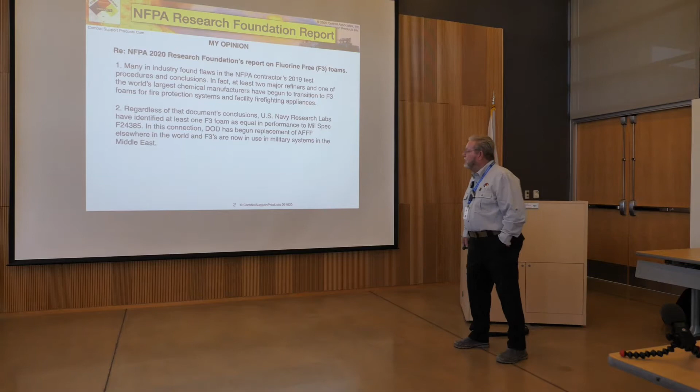Regardless of the document's conclusions, the U.S. Navy Research Laboratory has identified at least one F3 foam as equal in performance to mil-spec F24385, which is what the airports are using and all military people are using. In this connection, the Department of Defense has begun replacement of AFFF elsewhere in the world, and F3s are now in use in military systems in the Middle East.

So they've already made up their mind that the train's on the tracks, we're moving, and the technology today is way past what my esteemed friends in the committee did back in 2019. This is a moving target. So in defense of anybody that has any argument one way or the other, this is a moving target from a technology perspective. Government is forcing the issue in many cases, where they have prevented firefighters from using the good old AFFF that we happen to know is tried and true.

So they had to make a transition real fast in certain states. New York is one of them — in March, they have to do it. They have to make the transition out. They had been given a 2-year warning. And that would be one of the local states that might affect what you do or do not do.

Connecticut has already done it, and New Hampshire has done it. So I don't know where the Commonwealth of Massachusetts stands on it, but I suspect sooner or later there's going to be some sort of prohibition on the use of firefighting foams with PFAS in it.

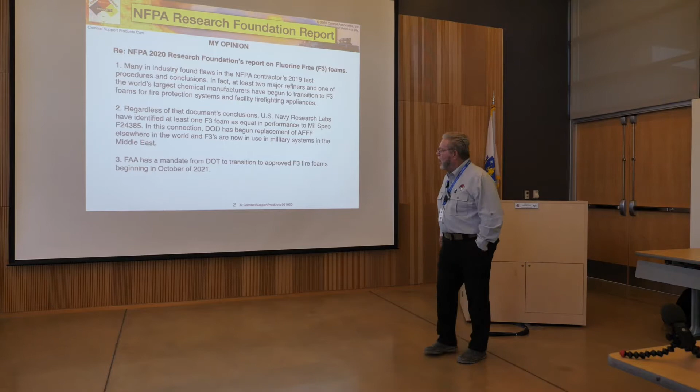Third, FAA has a mandate from Department of Transportation. FAA reports to Department of Transportation to transition to an approved F3 fire foam beginning in October of 2021. So the fuse is burned down to the charge right now as far as FAA is concerned. Now FAA says you don't have to — they're just giving the authority having jurisdiction the option to transition out of a mil-spec AFFF.

Finally, AFFF versus F3 — that would be aqueous film forming foam versus fluorine-free — is moot in many states where the use of AFFF PFAS is disallowed. So somebody's got to do something anyway.

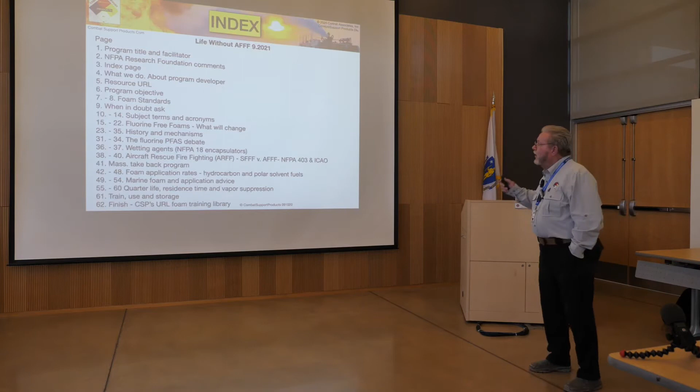There's the index that you heard tell of. I'm not going to spend a whole lot of time on that, but if you want to dig into the subject without any commercial speak, this is about as good as I can get it.

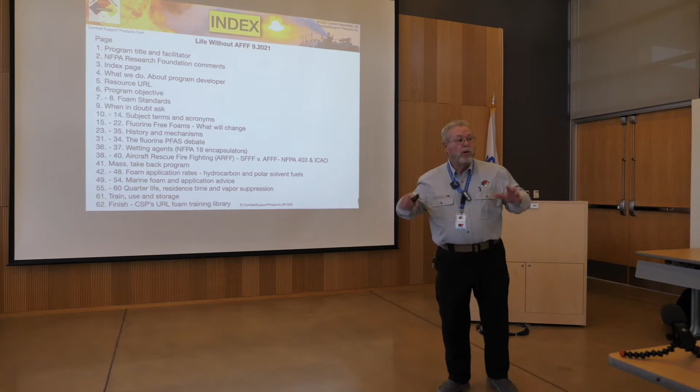This is the most current information that I have, and I'm probably one of the better contact people in the nation for this particular stuff for the fire service, because the fire service doesn't have anybody looking after them. The cop shop does, but the fire service doesn't. And it's the good old boy endorsement network in the fire service. Who's doing what is the question.

I rely on Underwriters Laboratory. Have to — most people do that are in the highly protected risk business. What do I do? What you see here, we do R&D, a lot of R&D lately, fire testing.

In fact, Wednesday and Thursday last, we were in New Jersey testing, doing UL tests on fluorine-free firefighting agents, the wetting agents, and the Class B foams, and that got all done at the request of the New Jersey State Police, who are pretty much in charge of driving the bus as far as hazmats are concerned in the state of New Jersey.

What they have done is pass the finance ball over. They write the checks and let the fire guys do what they have to do, which is a really good relationship, because as you know, the cop shop is much better funded than we are, usually speaking.

I do FDNY consulting, a lot of that. I look after all of their things, anything that has to do with foam, and have for more than 10 years, and their marine fleet. I look after systems on the marine fleet, foam systems, that is.

We manufacture these kinds of things, these foam trailers, and I do what we call special operations training. I'll go to an oil terminal and take the outside fire department inside an oil terminal. We call it a day behind the fence, to point out where the problems lie for the fire guys, not the engineering guys.

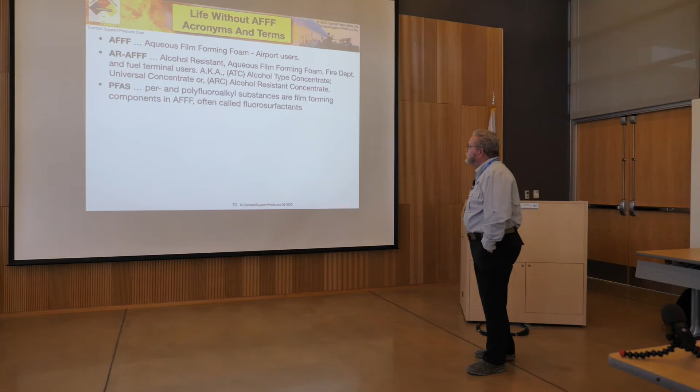AFFF: Aqueous Film Forming Foam, airport users. AR-AFFF: alcohol-resistant aqueous film forming foam, fire department users. PFAS: per and polyfluoroalkyl substance, the film forming component in AFFF, also called fluorosurfactants. SFFF, not to be confused with AFFF - this one's got me a little bit concerned because NFPA is now starting to use that acronym in the new standard, which tends to throw a little confusion into the game. Synthetic Fluorine Free Foam, not to be confused with Aqueous Film Forming Foam. In the industry, at least the window that I look out of, I use F3, Foxtrot 3. So there's that separation. Then there's an alcohol-resistant version of it, so it would be ARSFFF or ARF3.

Third-party certifications: since most of us in the industry aren't in the crapshoot, fire service is, and for some reason, I don't know why, there's nobody looking after them, but the guys that have to write the checks, the insurance guys, they want to see test results, they want to see third-party certifications. So the Navy is one, the U.S. Coast Guard is another, and they're very, very difficult to deal with. The Coast Guard is probably one of the toughest hoops to jump through for those in the manufacturing business.

Green Screen certification is now an international third-party environmental certification. If I say I have a fluorine-free agent, who else says it? If it's Jimmy Cottrell foam and I'm out there writing my own literature saying it's fluorine-free, who verifies that? Do you have to send it off to be tested or what? So there is an organization called Green Screen. It's international, and they are the watchdog in the chemistry world for things that are not cool as far as the environment is concerned. So now they're saying yes or no to PFAS - yes, the product has PFAS, no, the product doesn't have PFAS.

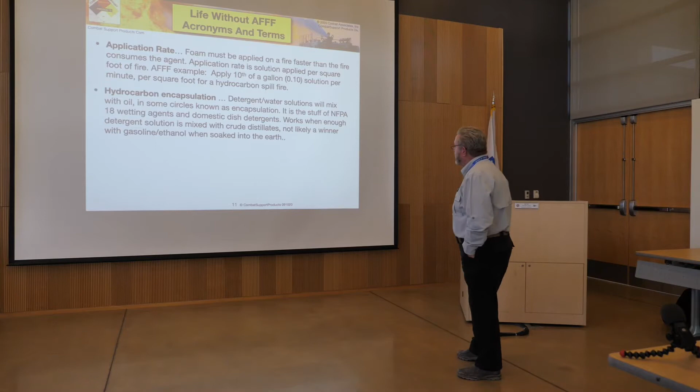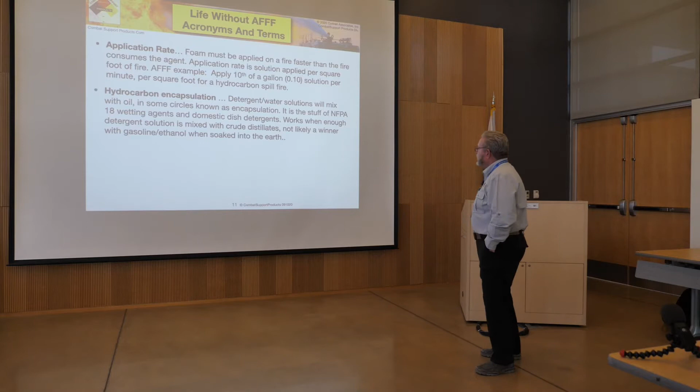Hydrocarbon encapsulation is a word that's getting thrown around the fire service a lot. In the oil patch, we're not hearing this, but the fire guys are hearing it a lot. Detergent water solutions will mix with oil, in some circles known as encapsulation. It is the stuff of NFPA 18 wetting agents and domestic dish detergents. Works when enough detergent solution is mixed with crude distillates. Not a likely winner with gasoline ethanol, or when the fuel is soaked in the earth, because with a detergent you've got to mix it.

And when I do my demonstrations with our wetting agents at the company I represent, I actually discharge a jet of detergent into a pan that has water and diesel fuel in it, and eventually the fire goes out because I have to mix it.

The detergents have pluses and minuses in them, from a chemistry speak, all right? Water and oil are all positive, let's just say, for chemistry speak, so they're repelling all the time. They will not come together. So when I put a detergent in its midst, I have to shake it or stir it to get the electrical systems' plus to connect to the minus. So that's what the energy does. It realigns the electrical systems so the oil and the water mix together. Without energy, you're not going to make the connections.

And this is why I typically use a jet of water through the 2.5 gallon water extinguisher to churn up the fuel. If I don't do that, the fire won't go out. So you're not going to have that luxury in combat, but it looks good for a demonstration.

Hot road spill — this is what scares me. This is what has my interest for you in terms of safety and survivability, also out in the fleet with Navy guys on a flight line or in aviation.

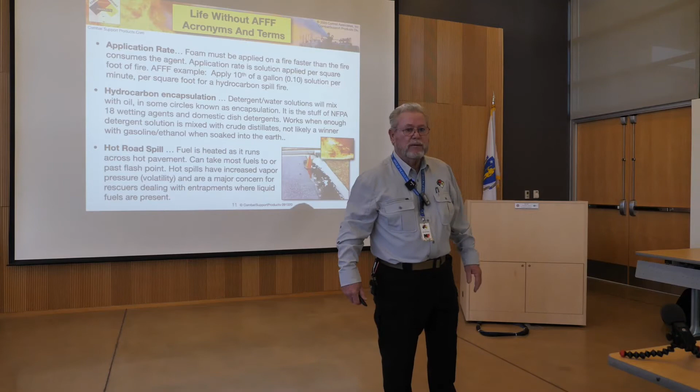Here at school we do these flammable—really it's combustible—liquid training with diesel fuel, home fuel oil, or kerosene, and just spray water into it until the temperature of the kerosene gets to the temperature of the water, and it goes out. We're lowering its flash point with the introduction of water streams. So once we get it much below its flash point, the fire goes out. Gasoline, you're never going to make that happen. Never going to make it happen.

Application types. Type 2 applications include those that one would use on foam-destructive fuels such as polar solvents and some acids.

Use a bank-in backsplash off the side of wreckage, or roll-on using nozzle velocity, to push foam onto a fuel spill or a gas or a fire as gently as possible. I've always been a fan of that. Even though I know the AFFFs could plunge into it and come up and still put the fire out, gentle application on alcohols is a must.

You cannot plunge your alcohol-resistant AFFFs into alcohols. It's got to hit the side of a wreckage, slide down, and creep across the fuel, or use nozzle velocity, as you're seeing in this shot, pushing the foam onto the fuel spill.

Hold vapors down—when do you replace it? When you smell gasoline, put it on again. I know I've got a $10,000 gas detector there, but if your troops are smelling gasoline while they're doing whatever it is they're doing, chances are you need to put a cap on it. Or use your instruments to tell you whether you've got hot fuel.

Type 3 applications include those that one would use on a fuel storage tank fire where over-the-top application is required, or where spill fires are engaged with plunging foam streams from hand lines, or these types of applications.

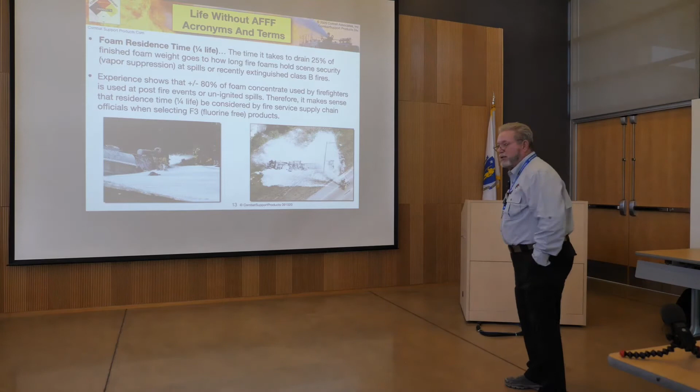Experience shows, now this is more statistical stuff that I've had to do. In fact, I had to do it for Colorado when they passed their law. And I'm saying to people off the record, talking to legislators, wait a minute. These guys don't put PFAS into the drinking water when they're fighting fire. The environmental impact is when they're holding scene security. They could be doing this for hours. Putting the fire out is a 15-minute exercise.

With gasoline, if you don't do something about it, it's going to be gone pretty quick anyway. It burns out about 1/8 of an inch a minute. So by the time all the king's horses and all the king's men and women get there to do something about it, most of the violence is over. Unless it's pooled, or worse, soaked into the ground. Once it soaks into the ground, you have a catalytic fire, no more surface fire. Slows it way down, but the fire is no less hot. So fuel soaked into the earth becomes a catalytic, capillary fire. A candle lifts the wax up the wick from the heat - that's a catalytic or capillary fire. So when fuel soaks into the earth and it ignites, that's the fire you have.

Fire protection engineering, be damned, there's nobody that does that research.

I worry about it. Did I just blow somebody's ears away when I hit that microphone? Anyway...

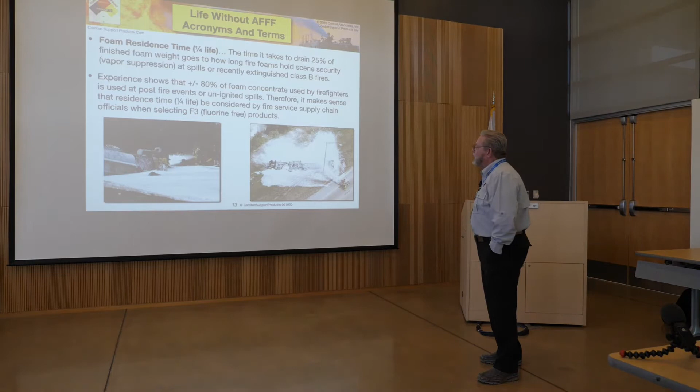Therefore it makes sense that residence time, quarter life, be considered by fire service supply chain officials when selecting F3 fluorine-free foam products. About 80% of foam concentrate sold for Class B fires is used for babysitting spills or unignited events, because there's still fuel. If it's been burning for an hour, chances are there's not much fuel left. Chances are you've got 18 200-pound rubber tires burning and a whole lot of fiberglass that still keeps that black stain in the sky. Chances are there's not a whole lot of fuel there left anymore, other than what may be in the trough of the tanker truck that will burn down to its liquid level.

So what the fire service is looking for is a stout brew for vapor suppression. But you want a light beer for fighting a flammable liquid spill fire - a light, frothy AFFF. Back in the day, or still today, you have that option. The AFFF as a froth puts the fire out pretty much on contact.

If there's no fire, there is no application rate. Just maintain a good 3, if you can, 3 or 4 inch blanket of foam. Gentlemen, ladies, it's water weight in the foam blanket that holds vapors down, not the bubbles. As the water drains out of the foam, gravity takes it out. The faster it takes it out, the lighter the foam gets, and eventually vapor escapes and finds its way to a source of ignition, and then the foam blanket lights up as well.

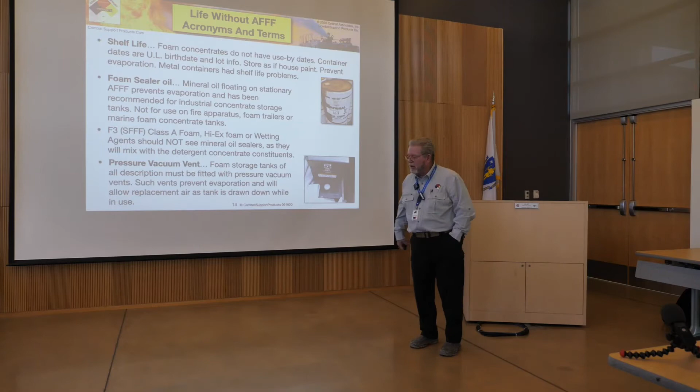Pressure vacuum vent. Foam storage tanks of all descriptions must be fitted with pressure vacuum vents. Such vents prevent evaporation and will allow replacement air as the tank is drawn down. So fluorine-free foams, these rules apply to those as well.

All your rigs have a pressure and vacuum vent on them. Whether they're in good mechanical condition, I can't vouch for, but if they're doing their job, the foam in the tank will be fine, regardless of how old it is. But you're going to have a problem with foam froth trapped in the pressure and vacuum vent if you don't keep the tank sealed.

The alcohol-resistant chemical that's in firefighting foam is sugar, xanthan, X-A-N-T-H-A-N, xanthan gum. Look on the back of your salad dressing container, that's what it is. It just so happens that when it detects alcohol, it kind of polymerizes and does what it's supposed to do. That's the stuff that gets caught in vents, and it dries, sort of like a loogie on your shirt - it's wet when it started and it's dried and you can't even peel your pocket open. The vent works the same way. Pressure vacuum vents will get stuck from that sugar.

What will change when you make the move to F3 foams? What will it affect? That's me when I was a kid, F3 foam, and when they had color pictures in those days too, smartass. I know you're going to say something. Anyway,

What's going to change? Application rates will increase due to the withdrawal of PFAS fluorosurfactants. F3 wetting agents have no such guidance, so wetting agents don't even have these guidances. Per UL 162, when using synthetic fluorine-free foams on hydrocarbon spill fires compared to AFFF, the rate increases from 0.10 gallons per minute per square foot to 0.16. And any way of looking at the math, that's 60%.

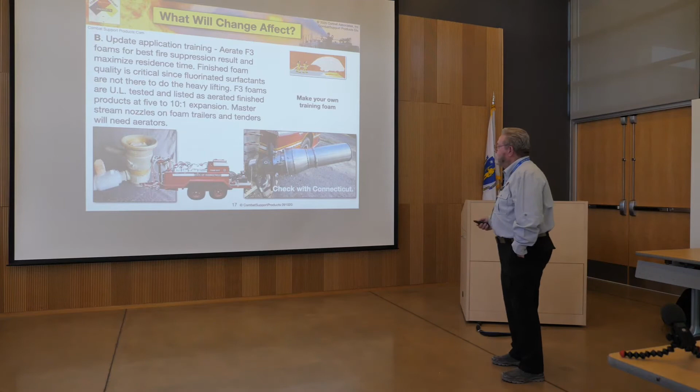Somehow nobody told you all that in the Commonwealth, because I see a lot of foam trailers without aerators on their master stream device. As long as they're dealing with hydrocarbons, they were good to go. So we're now making aerators for that old brass nozzle that's on most of your trailers and Connecticut's trailers.

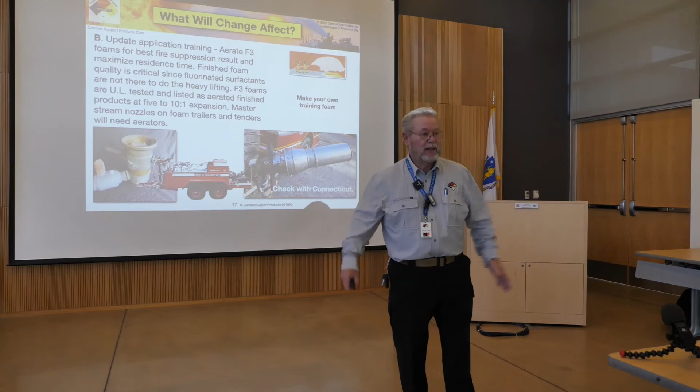They've had me engineer a clamp-on thing to make their systems work with the fluorine-free. Connecticut's making the transition, but they're not done yet. They're in trouble trying to figure out the definition of clean - how many parts per million or per billion in the rinse water and all the rest. So they haven't started filling the foam trailers yet until we get the definition of what clean is. But they are making all the changes to the firefighting equipment to accommodate the fluorine-free foams.

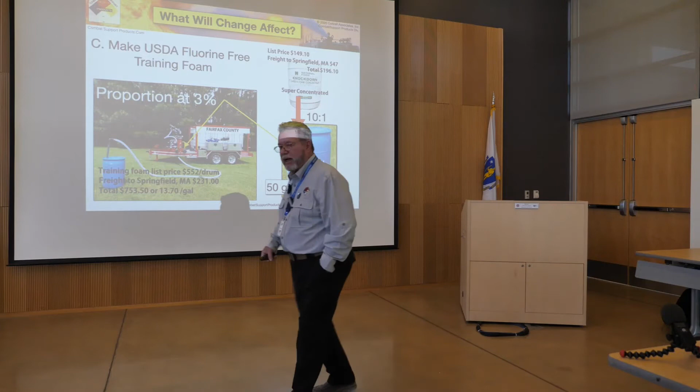Now, here's something my management group is not likely to be happy with, but I'm going to tell you anyway. When somebody orders a drum of training foam, it's going to cost $753.50 to get it to Springfield, Massachusetts. Big freight bill - we're shipping you a lot of water.

Probably about 50 gallons of water. The rest of this stuff is super concentrated, Mr. Bubble. So this is what I tell people to do: take the super concentrated stuff, which is USDA approved already because it's US Forest Service approved. So as far as they're concerned, it's good to go - Bambi can drink out of the pond after we go over it with a helicopter.

So I take a 50-gallon drum of water, put the water in the drum first, then put in 5 gallons of concentrate on top of it. In about 10 minutes, it's in solution. It'll disperse in the water column without you having to use a paddle or roll it around or anything. And I can do this for $3 and change.

So it's costing you a bloody fortune to ship the water from North Carolina or Indiana or wherever the foam factories are - Pennsylvania doesn't have foam factories anymore. And the freight costs are killers.

So what I do with our larger customers, where I do a lot of big training with big equipment, is I just fill a tote up 3/4 of the way with water and put in 1 or 2 5-gallon pails of this stuff and train our brains out. It's almost free, all things considered, and zero environmental impact. So there's a little tip for you.

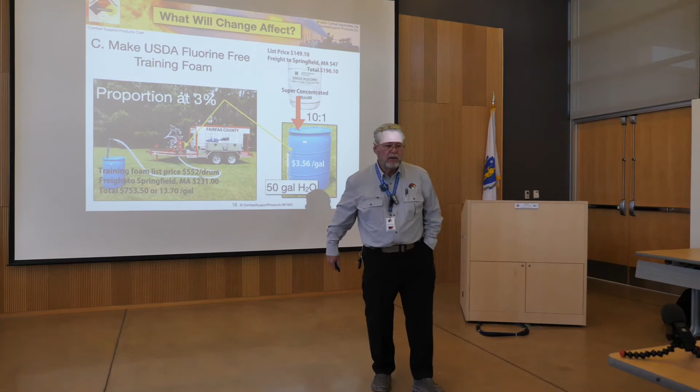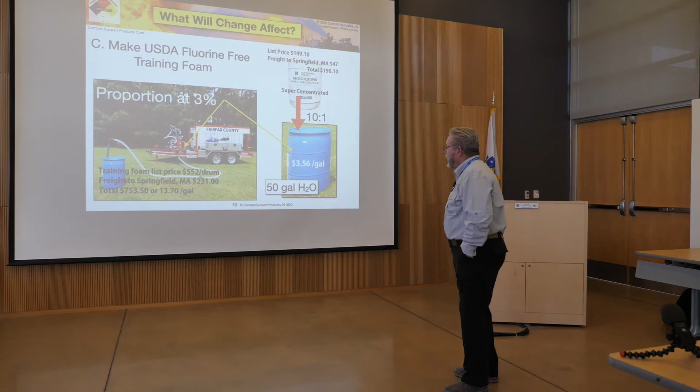The training foam - you can make it yourself without having any environmental impact. I think I'd let this go through the nick sniff test first before you go ahead and jump on it. But I've done it in Massachusetts before.

So here's something else that has to happen, or should happen to my way of thinking: the public's right to know. It's a good idea to inform the public of your changes to a non-fluorinated firefighting agent, as the old AFFF and the new F3s present the same. Remember, Class A foam and high-X foams do not contain PFAS. See the PIO, Public Information Officer, piece I published on my website - it's also part of this program's handout. So if you have a printed handout, that whole white paper I did is there, and that's what it would look like.

Next, cleaning and decontaminating apparatus, marine systems, and foam trailer tanks. The how-tos are included in this handout, which is also part of your handout. Those of you that have an electronic copy of this presentation, it's all there - all you got to do is print it out.

Now, this is, again, to my way of thinking, my opinion about how to clean a foam tank, because nothing's really changed over the years in that regard. But I can say this: the alcohol-resistant stuff tends to be a pain in the butt.

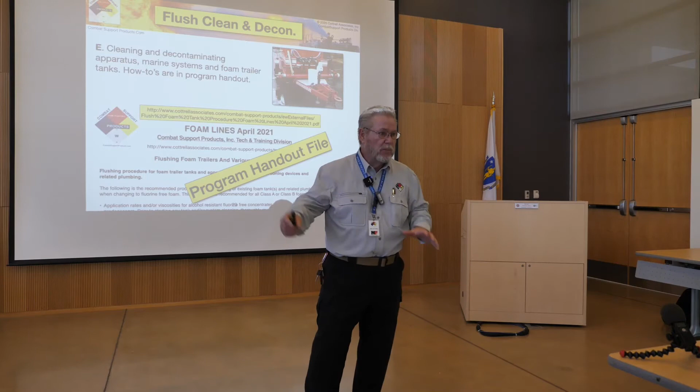Remember the sugar I told you was in it that made it thick and gooey? When you drain the tank, that stuff sticks to the interior. Getting it all out can be a challenge. How I've learned to deal with it is I use warm or hot water and let it sit in the tank for a half hour to an hour, which helps dissolve that sugar so it ends up in the water column. If you have the luxury of using warm water, great. If not, figure it out, because you'll be flushing until the cows come home if you're not using warm water.

Now, how do you know that you are flushed? When the flush water stops frothing, that means the Mr. Bubble chemical is gone, along with everything else that was carried with it. That's how I've done it for years. I tell firefighters to just discharge your hose line, shut off your foam system, and keep discharging until the water coming out of the nozzle runs clear on the ground. You're not seeing any frothing anymore, it's clean. You don't have to do it for a half hour, just discharge until the bubbles are gone. Kind of a common sense thing.

AFFF and alcohol-resistant AFFF concentrates and flush water should be incinerated. That right now is the state of the art. There are some emerging technologies in this area that may make disposal somewhat less expensive, and I can't be sure of that. Check with your State DEP for the latest guidance.

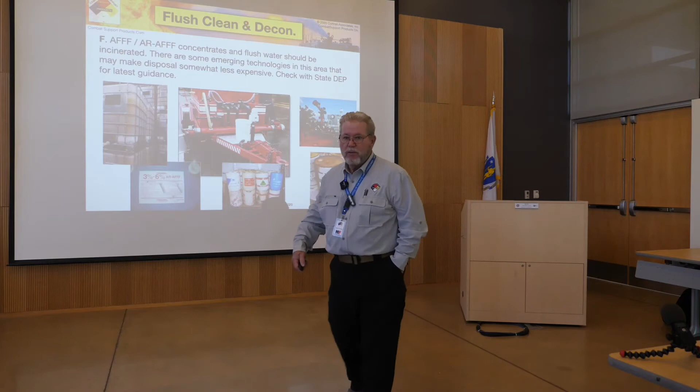I thought Nick was going to be with us today, but he got deployed. He and I have been connected over the years as far as technical advice. So between Nick and me and Connecticut and a couple other states, without my commercial interest being served, I've kind of helped out the family, as it were. I can say this.

I was contacted by a company that claims to have emerging technologies, and I sniffed it around a little bit, and it seems legit. You know how they deal with wastewater in sewage treatment plants with a flocking process, and the floc carries out the unwanted nastiness? Well, this company seems to have invented or knows of a way of a flocking agent that's sensitive to PFAS. I think it's real.

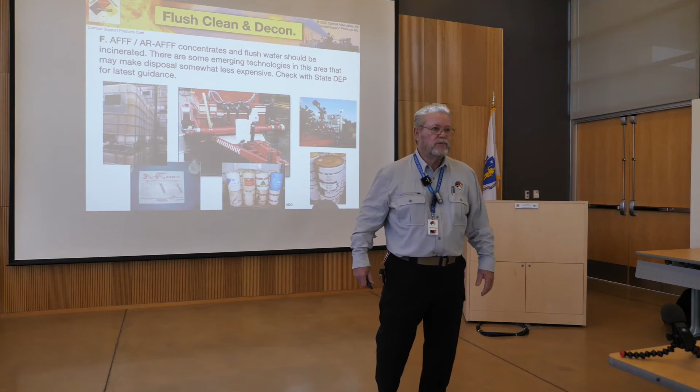What is it going to cost? I have no idea. But I can tell you they're claiming that when they're done with a 500-gallon foam tank, they're going to have a cow-patty-sized dried-up chunk of PFAS that can go to landfill or be disposed of some other way. That's just hearsay at this point, but I would be remiss if I didn't tell you where I was in terms of my latest information. They came to me at the FDIC with all kinds of sales promotion stuff, and I said, I'm coming here and there ain't going to be no sales promotion stuff. So I just said I'd mention the technology. I'll get Nick and Paul the information, and you guys can find out if it's real or not. The representative for that company lives in New Hampshire, and the other person lives in California. So that's enough said there.

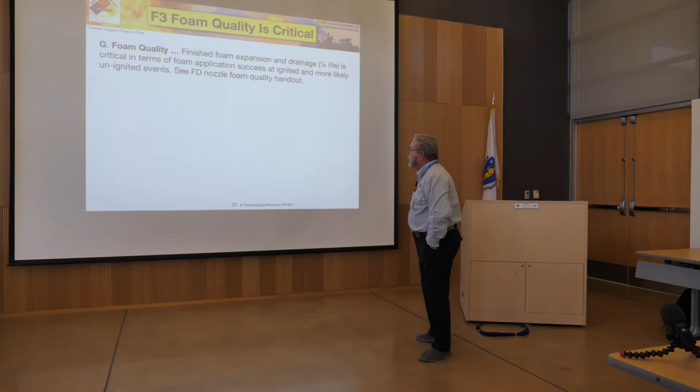Foam quality: finished foam expansion and drainage quarter-life is critical in terms of foam application success at ignited and, more likely, unignited events. See the Fire Department nozzle foam quality handout.

In August, Orange County—actually it was Orlando, City of Orlando Fire Department—their hazmat chief and I got into a conversation, as you can imagine I get a lot of conversations from guys like that. They are in the process of transitioning to fluorine-free, and his question was, you say it's got to be aerated, what do we have to do? I said, well, you can use what you've got. Akron, Elkhart, TFT—they all make a foam aerator attachment for your structural nozzle.

What I'm trying to do is make sure that you can get at least a 5 to 7 to 10 to 1 expansion, because that's how we test at UL. So when someone asks the question, if something hits the fan, did you use the product in accordance with its UL listing—the answer is yes.

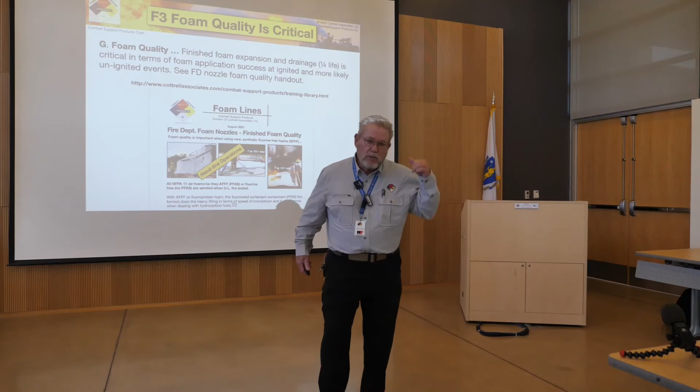If you didn't, then you could be in a hot seat, because the UL listing is predicated on foam quality. So if you use a kid's bubble wand, chances are it ain't going to work. So there's the deal. I created a document that separated the engineering speak out of common sense stuff, and there it is. So this would be a document that you have as your handout now. I did it in August. Fire Department foam nozzle, finished foam quality. We're looking down the barrel of this fluorine-free gun, so I'm wanting to tune you up on foam quality. So this would be my opinion, not National Foams or Ansuls or ChemGuards or whomever.

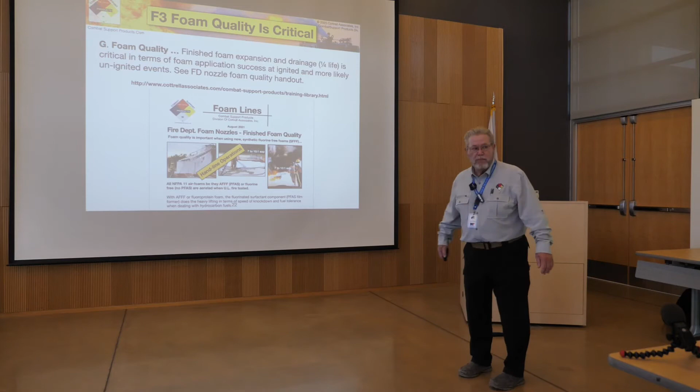I look after a lot of people's stuff out there as a contractor. This is Jimmy Cottrell's opinion and my company's opinion on this stuff. And I pretty well got a good reputation on it. So when you look at this stuff, it's going to make a lot of sense.

A little history. This was a job, one of my first fires that I was at, back in - I don't know, it was early. No, it wasn't my first fire, it was my first big, scary fire. This was in Newark, New Jersey, at a Texaco terminal, where they overflowed the tank. It blew up, killed some people, and this was the next day.

So things went bad that day. We never did put the fire out, just let it burn out completely, and there was 3 or 4 tanks involved. Once it got the headway on us, we just let her go. And all the experts came out and said - yeah, no, they didn't say that. They said, let's buy a lot of foam and put a lot of foam on it. And Chief Caulfield, who was the boss in those days in Newark, said, no, let's back off.

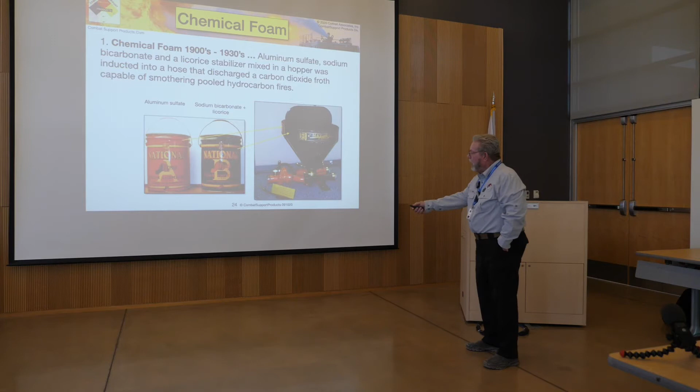So the history: how we made foam from the 1900s to the 1930s. We put aluminum sulfate and sodium bicarbonate and licorice stabilizer mixed into a hopper, inducted into a hose that discharged carbon dioxide froth capable of smothering pooled hydrocarbon fires. They poured A and B into an A and B hopper. Then in the 20s, there was a combination version of it made.

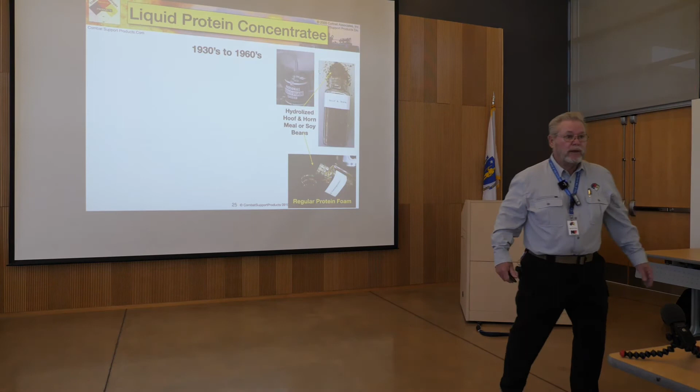And National Foam made a liquid here in the States. It was the only game in town, actually in the world in those days. And the Brits had Angus, who had borrowed the technology. The rest of our competition in combat didn't have this technology. And this is why, frankly, a lot of the Pacific Fleet survived when the other guys didn't.

The damage control parties used this Navy bean soup, as it were, and they used aerating foam nozzles and had to apply it gently. And if you discharged it in the air and wanted it to rain down, if you're out on a weather deck, the wind blew it away. So then you had to put it on and roll it on, or hit fuselage or hit something and let it roll on the fuel. Those days are back.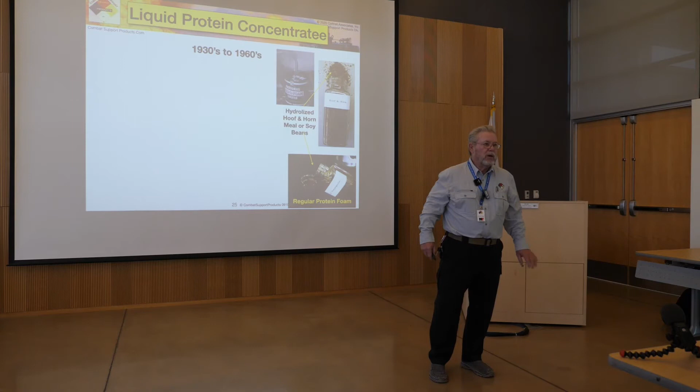Because these proteins had a magnetic attraction for the hydrocarbons, so as soon as you plunged them in, they'd come up on fire. They were like sponges - much, much worse than the current technology, but that was the case.

So during World War II, they put a lot of fires out with them, and then when the gorilla got out of its cage on the Oriskany in 1966, and then in Vietnam on the USS Forrestal, they were still using protein. The protein foams had - the AFFFs have yet - this was in 1967, the invention was in 1960, all right? The first Navy specification was in 1963. But in those days, that's how long anything took to get out in the fleet.

So in the meantime, you see what we got. Then AFFF started to get out into the fleet, and things changed very rapidly because it was a game changer. Now I could use a damage control station water spray nozzle. In those days, they were using an SG-60, if you recall that Rockwood kind of nozzle. And then they changed over to a water spray periphery nozzle.

With AFFF, there was so much Mr. Bubble jammed into this stuff, and so much fluorosurfactant jammed in, that they could use a non-aerating damage control station nozzle, and it frothed up to beat the band just from its excitement going through the air. At about 50 psi nozzle pressure, we're at 88 feet per second, so a lot of the foam bubbles survive the shear. Once we get up to about 100 psi, too much shear, and a lot of the bubbles don't survive. So the aerator had to be invented for that.

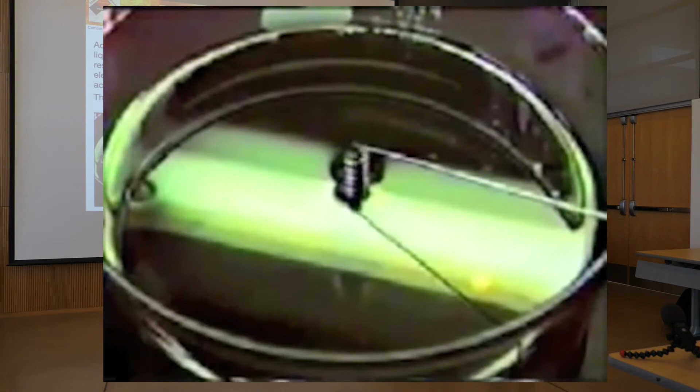This video clip represents an aqueous film spreading across heptane. Heptane is a test fuel used by U.S. Navy Mil 24385 and Underwriters Laboratories.

So here the foam blanket acts as a reservoir for aqueous film release. It releases its water film over time, much as a beer head drains its beer in a glass.

So as soon as I put that dollop of foam on that Petri dish that has heptane - heptane is our test fuel. Heptane is a day on the beach compared to gasoline, by the way.

Heptane has a flash point of 25 degrees. Gasoline is 50 below zero.

So heptane, when it's burning, takes on the fire characteristics of pretty much all known hydrocarbons, with the exception of gasoline blended with ethanol, which is why I get so emotional over this, because you're the only ones that have to deal with gasoline with ethanol. The guys in the oil patch don't.

Nor does the Navy. So here the foam blanket acts as a reservoir for the aqueous film. So as the foam blanket drains down, like cheap beer and light beer drains down, it keeps sending out the aqueous film. We know this is healing.

The foam blanket is healing. So as you traipse through it or pull hose lines through it, as it keeps draining down, it keeps healing in behind you. You roger that? So these are healing foams. The term healing was invented there.

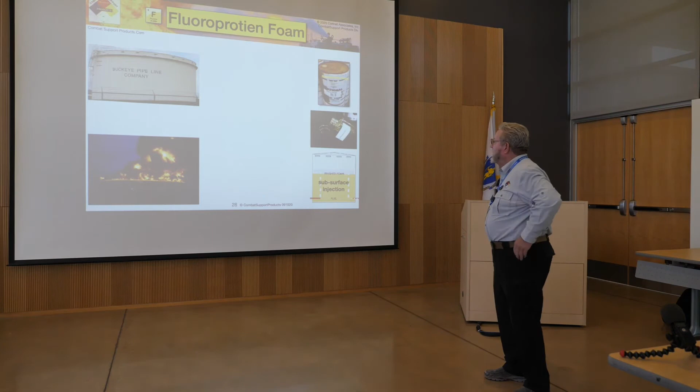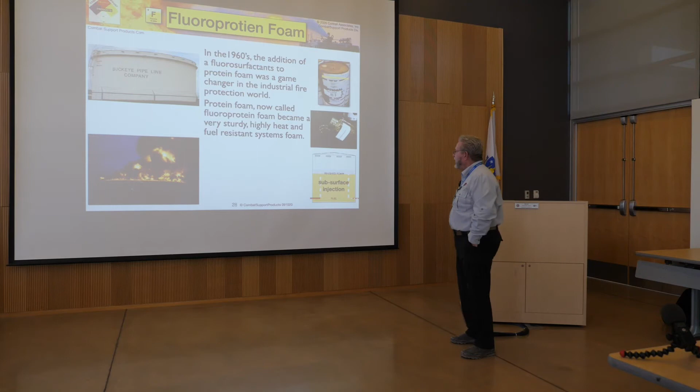Fluoroprotein foam. In the 1960s, the addition of fluorosurfactants to protein foam was a game changer in the industrial fire protection world. Protein foams, now called fluoroprotein foams, became a very sturdy, highly heat and fuel-resistant systems foam. Added fluorosurfactants allowed plunging, over-the-top tank firefighting, type 3. There was no such thing as type 3 until the fluorosurfactants were added to firefighting foams. You could add fluorosurfactants to Mr. Bubble, synthetic, or you could add fluorosurfactants to proteins, fluoroprotein.

This changed everything. Now it allowed subsurface injection because the oleophobic nature of the fluorosurfactants allowed the foam to rise through the fuel column, surface, and put the fire out. With regular protein foam, didn't happen. It came up on fire.

There's a lot of systems out there, particularly older systems. For those of you that do in-service inspections, I don't know what the Commonwealth of Massachusetts does for fuel storage tank inspections, etc. But I can tell you this, there's a lot of subsurface injection systems out there that are using AFFF or fluoroprotein. They transitioned into the AFFF probably in the mid-1980s, early 1990s from the fluoroprotein as improvements in AFFF technology continued to move.

Fluorine compounds, PFAS, and AFFF is so oil resistant that it can be injected, I already said that, but not with fluorine-free foams. This is going to be a problem.

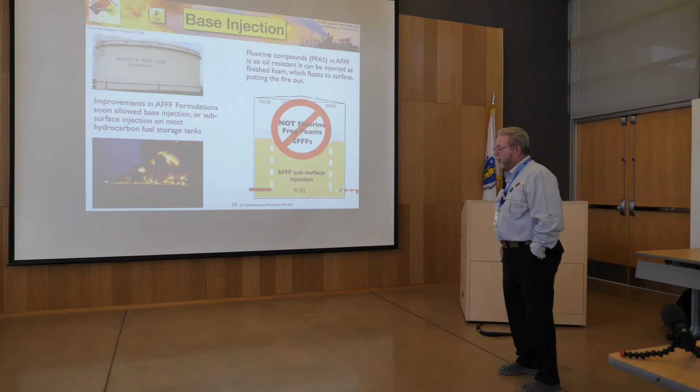I'm going down to Norfolk, Virginia, Chesapeake, and the Navy's fuel storage farm on Craney Island, which is the biggest fuel storage facility, one of them in the world, and there's a lot of these systems down there, old systems. And now you know why I'm going down there. So we got to talk about how we're going to transition out of subsurface injection. There's a place called Kinder Morgan down there that actually I've got to go visit and talk to them about what the options are. Because if corporate says we're changing, I'm not too sure they thought about this.

So alcohol-resistant variants were developed in the 1970s. I'm not going to spend a lot of time on this. All I can say is when the xanthan gum detects alcohol, it turns to a polymeric raft. So as the foam drains, as soon as you put it on the alcohol, a little bit of violence takes place and the foam blanket is destroyed for a moment. But what happens is this polymeric raft comes out underneath the foam blanket instead of water. It breaks the electrical connection between the alcohol and the water in the foam blanket.

Alcohol has a tremendous magnetic attraction for water. So since the foam blanket is 97 parts water, as soon as you put the foam on the fuel, if it's not alcohol resistant, it disappears. So adding the xanthan gum changed all of that. So that was the big game changer here. And that's what it looks like after all the foam goes away.

And that's isopropyl alcohol. That would be our test fuel. You know it as dry gas. The blue dry gas is methyl alcohol, the cheap stuff. The really good stuff was the red stuff, which is isopropyl, very aggressive. And that's what we use at UL for testing alcohol. So, alcohol-resistant foam. So that's what the goo looks like that I just pulled off the top of that dish after the foam went away.

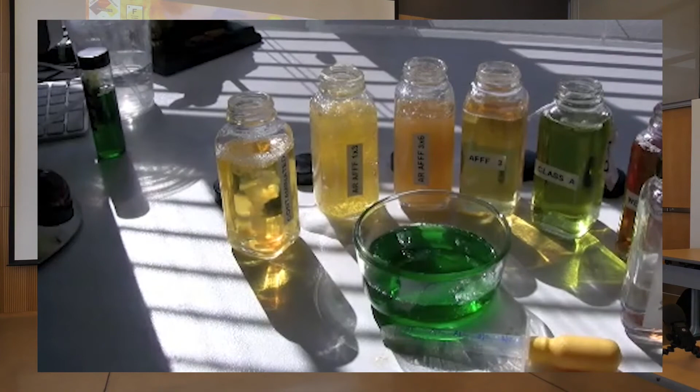Add some more ethanol to this little dish here to bring its polarity back up. And now I'm going to pump some regular AFFF into that dish. Let's see if we can zoom in. AFFF or Class A foam or a wetting agent will do this. This is straight AFFF.

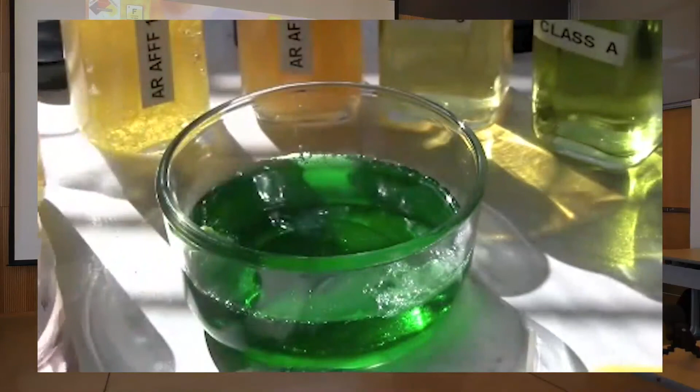Also, wetting agents will behave the same way. And I'll just put that on there. And as fast as I apply the foam, the alcohol drinks the water right out of the foam blanket. Alcohol has a strong magnetic attraction for water, and that's what you're seeing going on here.

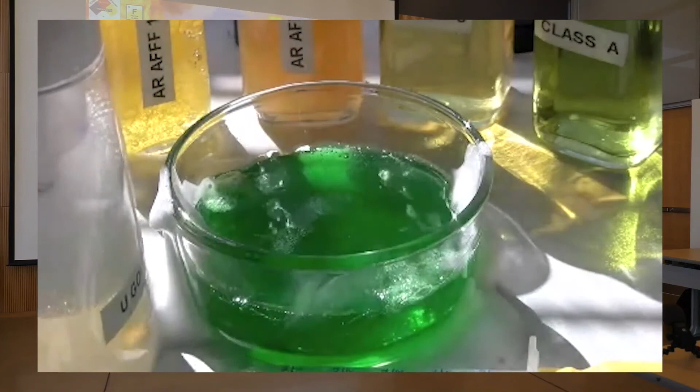The next thing I'm going to do is apply some alcohol-resistant foam. Now this would be Universal Gold, and this is a 3% solution, 97 parts water and 3 parts concentrate.

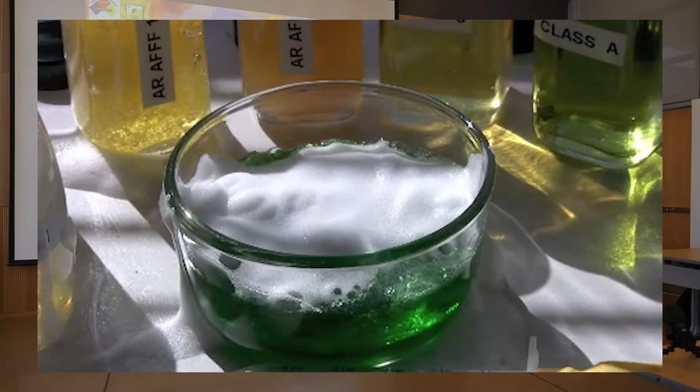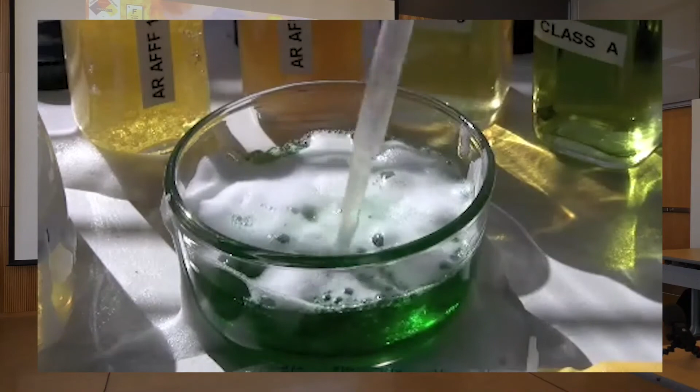And I'll just put a little bit on there to give you an indication that something is in fact happening. What's going on now is the thick material that's in the foam concentrate is turning into a polymeric mass underneath the foam blanket. The foam blanket rides on the polymer, and that's what disconnects the alcohol from the water in the foam blanket. If I plunged it, it would destroy the foam, and that's just what I'm doing now.

I'm plunging it. Now the only thing left is the polymer. The polymer is the material that precipitates out of the foam blanket that allows the foam to ride on it.

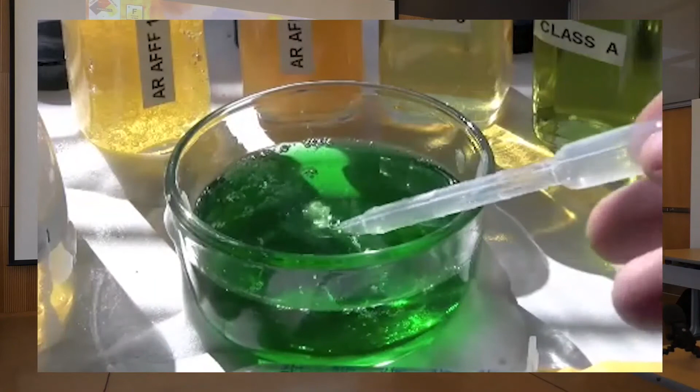So alcohol-resistant foams, otherwise known as smart foams, will create a polymer on the fuel in case of alcohols, or in case of regular simple hydrocarbons like kerosene or aviation turbine fuel, one can expect it just to make an aqueous film. Not so anymore with the fluorine-free. It won't make an aqueous film, but it will behave the same way on alcohol.

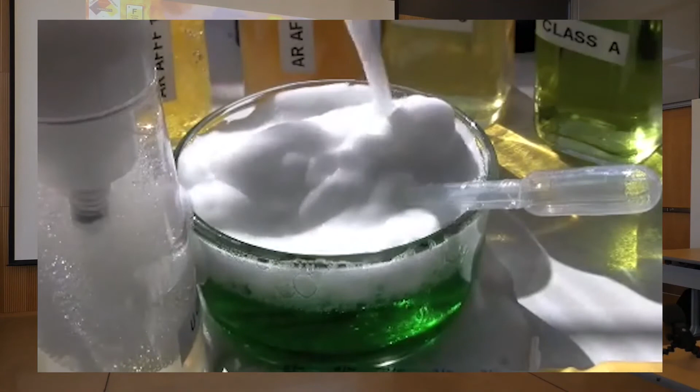It's absolutely necessary that you apply the foam gently. You cannot plunge alcohol-resistant foam into alcohol. It has to go on gently.

So there's the xanthan. Like I say, if you look on the salad dressing container, you'll see that. You'll see it in other foodstuffs. There's nothing there that's going to give you babies with 3 heads.

This is at room temperature, 22 degrees C, 70 degrees F. And the bubbles that you see on the backside near the label of the container is where my fingers were when I set the dish down on the desk. Just the heat from my hand raised the vapor pressure at that spot that high.

So be advised in combat that when you're dealing with some of these things, their vapor pressures tend to be very high. Their vapor pressures are adjusted with temperature. The higher the temperature, the higher the vapor pressure. You may play hell trying to get yourself proper readings with your detection equipment.

If you smell the stuff, if you smell the fuel, you got a problem. You don't need a $10,000 gas detector to tell you that. The problem with that is your nose is up here and gasoline vapors are on the ground, unless the wind carries them up to your nose. So be careful of my comment about if you smell it, you might have to be crawling on the ground, but a good gas detector will find it.

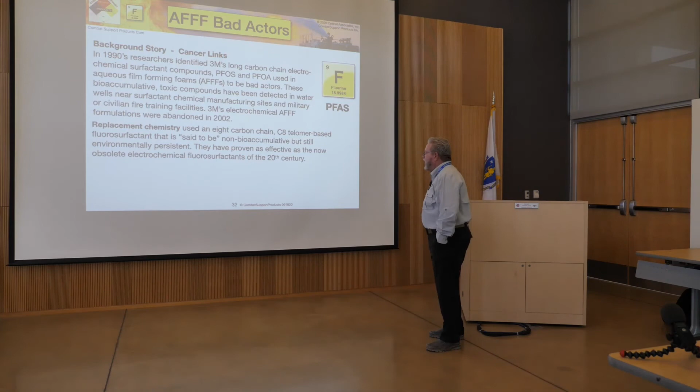Replacement chemistry used an 8-carbon chain, C8 telomer-based fluorosurfactant, said to be non-bioaccumulative but still environmentally persistent. These have proven as effective as the now obsolete electrochemical fluorosurfactants of the 20th century. So industry-wide it has changed to the C8, C6 fluorotelomer stuff that's not biopersistent, but is environmentally persistent.

Now, this is what some science says, and there doesn't seem to be a whole lot of agreement on this. In 2015, all AFFF formulations transitioned from C8 to a C6 purified fluorotelomer surfactant compound. The U.S. Navy mil-spec F24385 AFFF changed to C6 fluorotelomer sometime earlier, and is now the standard in the fleet and FAA Part 139 airports. So they say it's not biopersistent, but certainly environmentally persistent. That's what I know right now.

Here's a little bit of background: there's the fluorine element up there, and they connect a whole bunch of carbons to it. The longer the carbon chain, the more persistent it gets — carbon makes it more and more bulletproof, as it were.

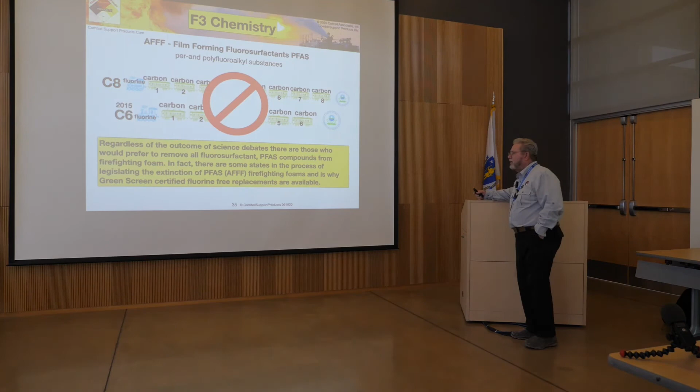Regardless of the outcome of the science debate, there are those who would prefer to remove all fluorosurfactant PFAS compounds from firefighting foam. In fact, some states are in the process of legislating the extinction of PFAS AFFF firefighting foams, which is why Green Screen certified fluorine-free foam replacements are available.

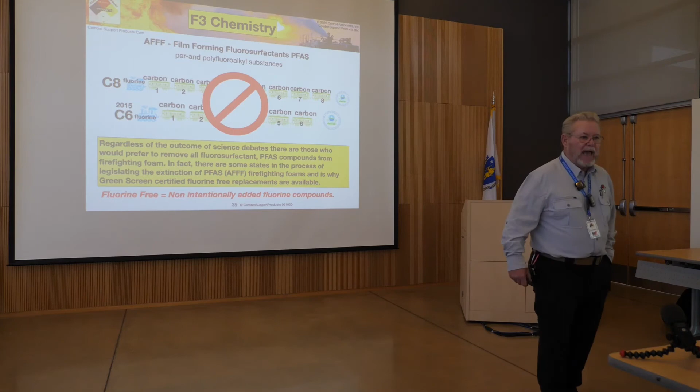When I say Green Screen, I know there's a third party saying it doesn't have it. Here's a disclaimer: when we say fluorine-free, we mean we're not intentionally adding any fluorosurfactants or fluorine when they manufacture the foam. Don't forget there's fluorine in the water they mix it with at the factory, so when someone says it's fluorine-free, that's maybe not right. What we're saying is there's no fluorosurfactants added, no intentionally added PFAS, and you'll see that disclaimer, if they're smart, all over. Because if someone says we're fluorine-free and you check it out, well hell yeah, there's fluorine - it's in the water they mixed it with. So now we have to define what clean is.

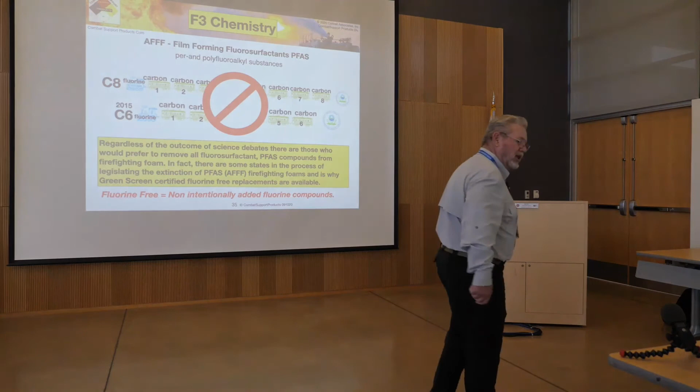There's the 900-pound gorilla down in Connecticut right now. In fact, I'm stopping there tomorrow on my way to Maryland, or to Virginia.

Oil and water do not mix, and here's the wetting agent mechanism - actually it's just detergents. Oil and water don't mix and are known to be insoluble since their electrical systems tend to be similar, plus plus. The addition of a detergent surfactant, plus minus, and a shake or energy mix creates a plus minus emulsion, which is the mechanism of dish soap or wetting agent fire products. Some foam, most do not, so you add it.

Here's a salad cruet, and this is my example: water and oil. Tear open the package of Good Seasons salad dressing mix and pour it in on top. Then what do you got to do? You got to shake it, because now what we have to do is align the pluses and the minuses, and you got to do that with energy. That's why you got to shake it.

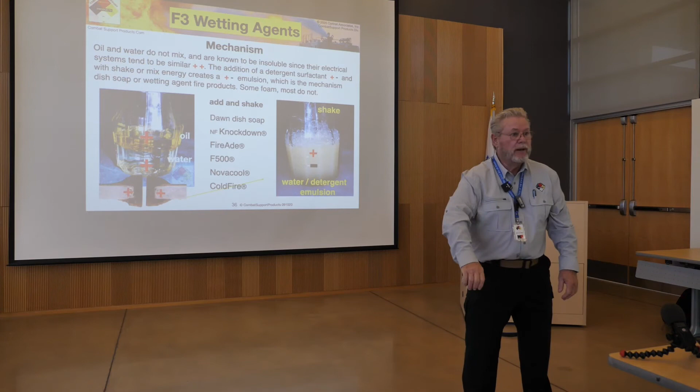This is why when you wash your hands, you have to do this - you got to align the pluses and the minuses with the detergent, water, and stuff you're trying to emulsify. This is why your washing machine has got a zhoo zhoo zhoo zhoo in it, your dishwasher's got a zzz zzz zzz thing in it. It's got to have energy in order for detergents to do what they do.

So once I got fuel on the ground and it soaked into the earth, the energy ain't an option anymore. It's only an option with my demonstration, and I'm guilty of it. That said, these are some of those products, and I'll paint myself with the same brush.

And they all have NFPA 18 UL listings, not NFPA 11. The science is irrefutable, it's good science. It does what they say it'll do on most oils - certainly not gasoline, and certainly not fuel soaked into the ground. That's just impossible, I'm not going to waste your time with that.

Did that screw you up on your... You went right past? You are good, Paul.

Will airport foam MIL 24385 be affected? Not at the present - February 2020 is when I wrote this. The Federal Aviation Administration still mandates FAA-controlled airports use a C6 mil-spec foam. That would be Part 139 airports. There are some smaller airports that are not so regulated.

However, FAA reauthorization legislation, HR Bill 302 of October 2018, included wording that will allow airport fire departments to substitute MIL 24385 with an approved fluorine-free agent qualified by NFPA 403, within 3 years of Bill 302 becoming law, targeted for October 2021. So when I wrote this, my crystal ball hadn't gotten to where it is now, and right now we're getting a little bit of a tap dance because they haven't made up their mind yet.

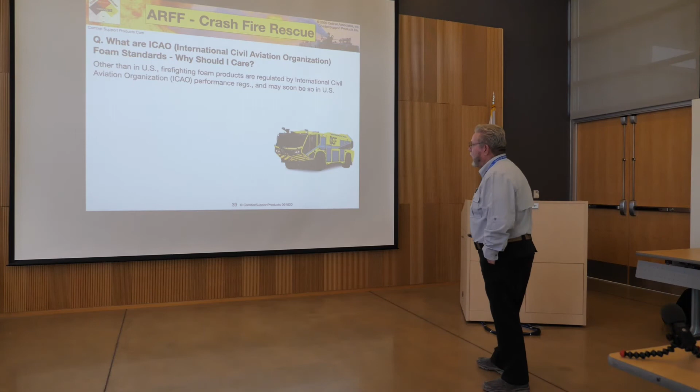Other than in the United States, firefighting foam products are regulated by International Civil Aviation Organization, ICAO, performance regulations, and may soon be so in the United States. In the U.S., NFPA 403 standard for aircraft rescue and firefighting is the ARFF guidance document. NFPA does not approve or test fire foams, but rather promulgates performance standards which are currently set by FAA and certified under the U.S. Navy's AFFF specification 24385. So everybody's got the same stuff - wonderful. When they start making this transition, everybody's not going to have the same stuff, and I'm wondering how that's going to work.

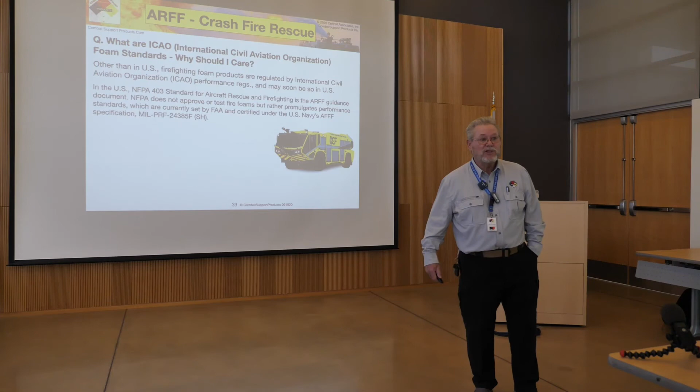ICAO have performance levels A, B, and C for fluorine-free foams, which differ from mil-spec AFFF and are now recognized by NFPA 403. NFPA said, okay, we're going to recognize ICAO now. And I know they did a lot of research.

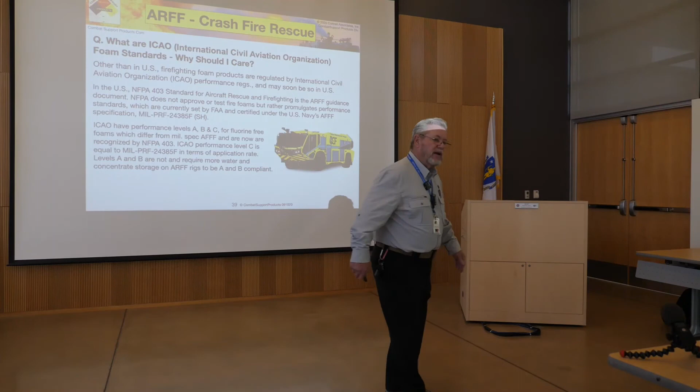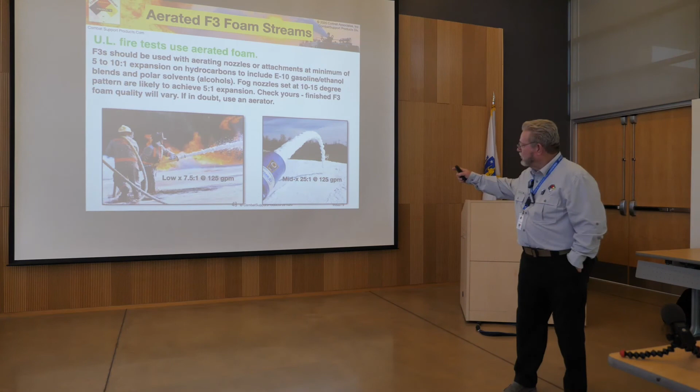So this would be a 25 to 1 expansion at 125 gallons a minute. So we got a little bit more water weight working for us there. So the vapor suppression with medium expansion foams up to about 25 to 1 is optimal for putting the fires out.

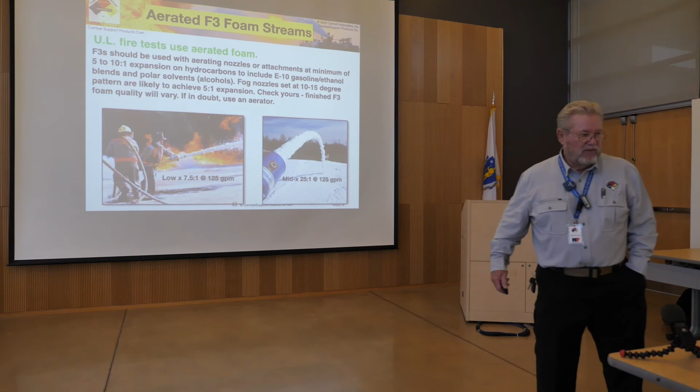7 to 10 to 1, and if I had my way, I'd be 10 to 1 all the time. The better the expansion, the faster the fire is going to go out and the more secure it's going to be. Yes, sir? Do you lose significant throw? Oh, hell yes, at 25 to 1.

With this one on the right, as you turn it all the way towards straight stream, you get a jet of foam, a rope, that expands about 7 or 8 to 1. As you go from straight stream towards fog, you're entraining more air, and you're hitting a screen that's in the middle of the nozzle. The screen makes sure all the bubbles are the same size.

That was a pretty neat invention. We thought about that back with Dow Chemical and DuPont when we were trying to deal with their fuming chemicals in the 80s. So I just cross-pollinated that into this thing.

And so as you go from straight stream to fog, you change your expansion ratio. Your reach changes proportionately. So as you go from straight stream with a 100-gallon-a-minute stream, you're looking at about 70-ish feet, give or take. And as you go from straight stream towards fog, it drops off proportionally until it's just falling out of the thing.

So it's definitely not for firefighting. It's for post-fire security, vapor suppression. If you want to fight fire, go all the way to straight stream and get that reach. And as you want to do vapor suppression, now you have the tool all in one. I think Elkhart now has something like it as well.

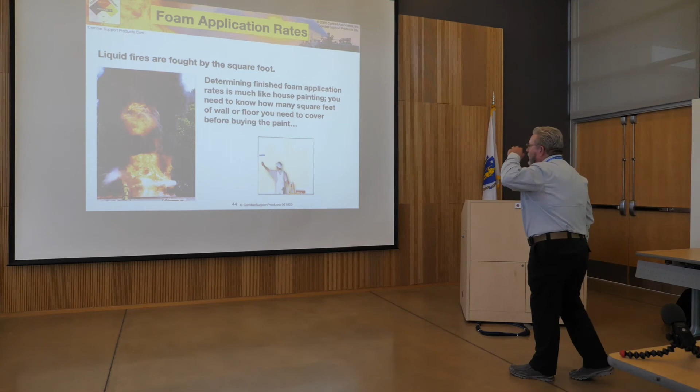So, liquid fires are fought by the square foot. Determining finished foam application rate is much like house painting. You need to know how many square feet of wall or floor you need to cover before buying the paint.

The smart money from management's perspective would be to tell the troops, if you've already taught them how to deal with alcohol, to tell them to treat all fuels as if they were alcohol. If you can cover that bridge, you've got it made.

So if you have an alcohol-resistant, fluorine-free foam, and there are several out there, just tell the troops to make believe all hydrocarbon fuels are also polar solvents. That way you'll apply gently and get good aeration, because you had to do that with alcohol.

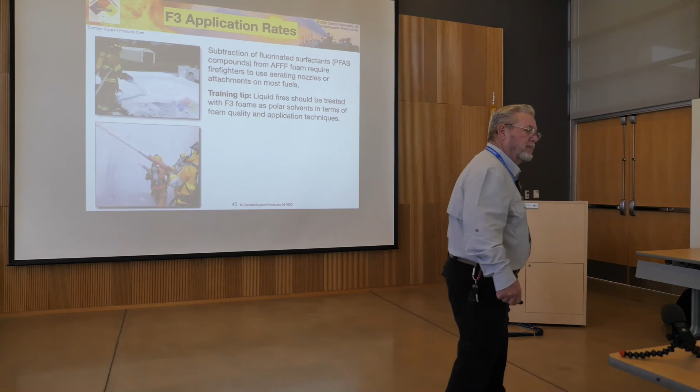Alcohol-resistant formulations, AR-F3s, are available using similar non-fluorinated polymers as found in AFFFs. I covered that already. UL application rates for spill firefighting can increase by as much as 60%, and stay the same for fuel storage tanks. So the guys in the oil patch, if they have to transition to fluorine-free, they're already there, because they had to go to 0.16 for over-the-top firefighting with AFFF in many cases.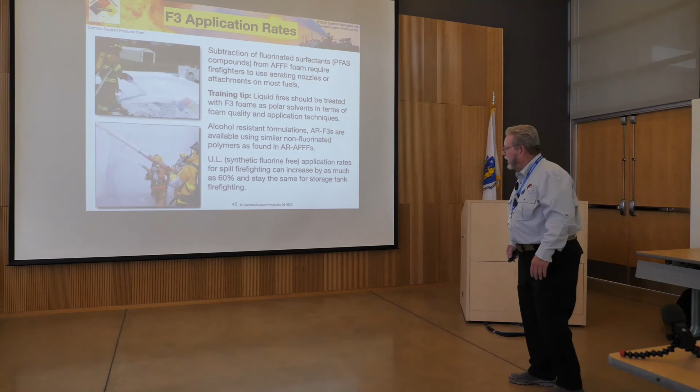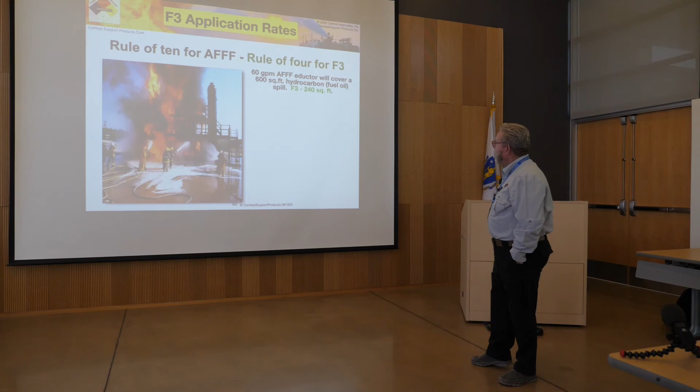Fluorine-free foams are not intentionally added fluorine compounds. The rule of 10 for AFFF and the rule of 4 for fluorine-free, I think I covered this earlier. Multiply the 60-gallon-per-minute eductor times 10, and you'll have 600 square feet of success. With fluorine-free, multiply times 4. So if you remember my old rule of 10, just replace it with the rule of 4, and you're good to go.

Here's something I'm thinking about now, and I've been thinking about it for months. Since we know application rates have increased by a lot, I'm going to say that the 60-gallon-per-minute eductor is a dinosaur. The 95-gallon-per-minute eductor is a dinosaur. A 125 eductor is probably minimum now.

Which may make management have to buy something that they probably might not want to. But to my way of thinking, I want proportioning accuracy spot on. Remember, the fluorine is gone, so all the stuff that made us look good is gone. We've got to manage these things a little bit better.

We're assuming that a 125-gallon-per-minute eductor is drawing 3.75 gallons of concentrate a minute at 3%. Who said? Where's that written? Is it a UL-listed device? Hell no. National Foam does, but the mainstream guys, Akron, Elkhart, TFT, who else did I miss that I'll upset if I don't mention their name? Anyway, Kochek, I think they've got some imported nozzle or something.

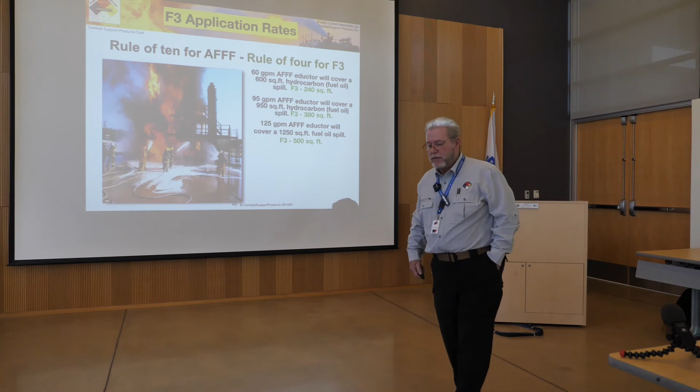What GPM are they using? 125s. And if I could make a 150, and my fingerprints are on a lot of this stuff, I would, but now I've got a problem with 1 3/4 inch hose. At 150 gallons a minute, the distance between the nozzle and the eductor starts to really get low. If I can talk the fire service into using 2-inch hose with a 150 or 175 gallon-per-minute eductor, then you're back in the game.

2-inch hose has half the friction loss of 1 3/4. That way the distance between the nozzle and the eductor changes proportionately. I'm not going to get into all of that with you now, but there's a handout on the website that explains it.

The 250 eductor will now cover 1,000 square feet, used to cover 2,500. And if you have one of those 350-gallon-per-minute eductors for your blitz fire, the coverage changed similarly. Let me go back, it might help.

I did it again. What a schmuck. Whoops. Okay, everybody knows it now.

The 350 eductor is used to cover a 3,500 square foot spill, which is a really sporty size fire. Think about it, a single family frame has about 800 to 1,000 square feet on the first floor, thereabouts. The old Cape Cods had about 700-800 square feet on the first floor. So without furniture and everything, that's a big sporty fire.

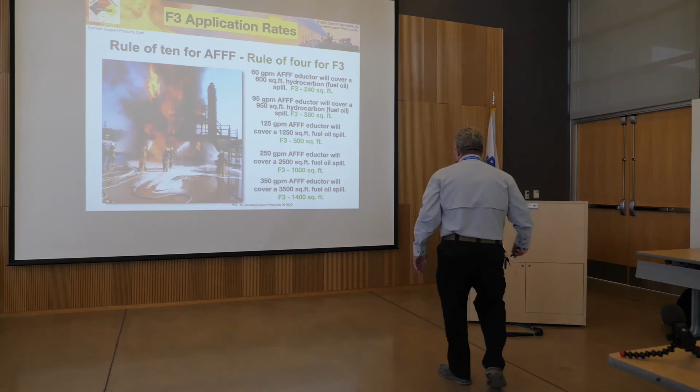Here's the problem: reach. If I've got a 700 square foot fire and I use a 100 gallon a minute eductor and nozzle, I'm not reaching it. I've run into this. I've got a program called Combat Engineering that gets into all of this. Sometimes you've got to use the 250 gallon a minute nozzle and eductor to reach the fire you've calculated you only need 100 gallons a minute for. So reach and range is my pet peeve. Anybody that's sat through my Combat Engineering programs knows that's all I preach - reach and range.

Polar solvents - alcohols, esters, and ketones. The most likely fuel firefighters will encounter are transportation events where gasoline-grade ethanol or methanol is in transit, UN placarded 1987. Most UL-listed AR-AFFFs, this is the old technology, will apply aerated type 2 gently at 1/10 to 1/4 of a gallon per minute per square foot, depending on the solvent involved. Solvents have different polar strength - the more polar they are, the more attraction they have for water, the higher your application rate has to be to accommodate the polarity.

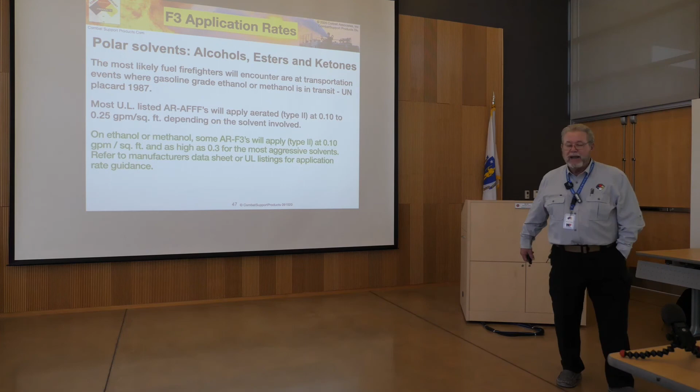On ethanol or methanol, some AR-F3s will apply type 2, gently, at 0.10 gallons per minute, and as high as 0.3 - three times more - for the most aggressive solvents. Refer to your manufacturer's data sheet or UL listings for application rate guidance. So whatever you do, you're going to have to make reference to what application rates have to be. I can tell you ethanol and methanol are likely to be the two you'll always run into on the highway, and they are - they're easy. That would be a 0.10, at least for my stuff.

Once you get up into isopropyl alcohol, ooh, that's a different story - you really have to have your act together. So if you're hazmat guys, say you've got a foam trailer that's the hazmat asset for a certain county, that's the one that has to have a long pedigree of UL listings. Because it's likely to be invited to an unignited event anyway, since by the time they get it there, most of it's over. But if it's unignited and you're babysitting a big event, you're going to want something that'll hold up long-term vapor suppression with as little environmental impact as possible.

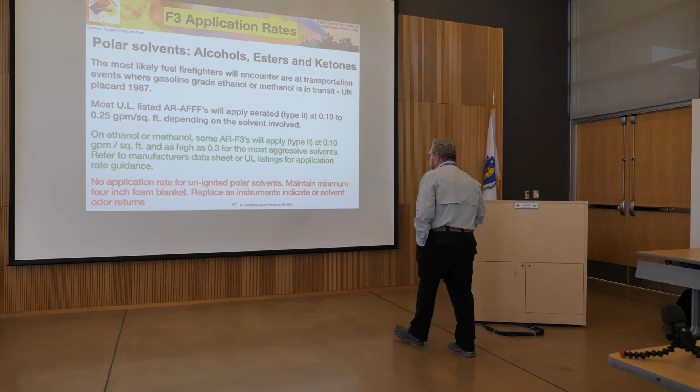There's no application rate for unignited polar solvents. Maintain a minimum 4-inch foam blanket. Replace as instruments indicate or as solvent odor returns. Somebody held my feet to the fire on Thursday in New Jersey, because we do this program and then go outside and actually do it. They said, show me what a 4-inch foam blanket looks like on the ground.

Got me. Gravity wants to keep pulling it apart. All right, I got it maybe to 3, and then I cheated and got to medium expansion, so - now you just heard me take the hit. They caught me. Actually it was the FDNY hazmat guy who said, well yeah, you're saying 4-inch, how do you get 4 inches? Well, we were there doing it. I said, there's a 4-inch. No, it isn't - close, but not 4 inches.

So I also throw darts at the wall when I'm speaking. 3% AR-F3 UL application rates - application rate is foam water solution flow per square foot of fire. A 1,000 square foot gasoline hydrocarbon fire requires 160 gallons a minute to achieve extinguishment. That would be a 0.16 - that's the UL application rate.

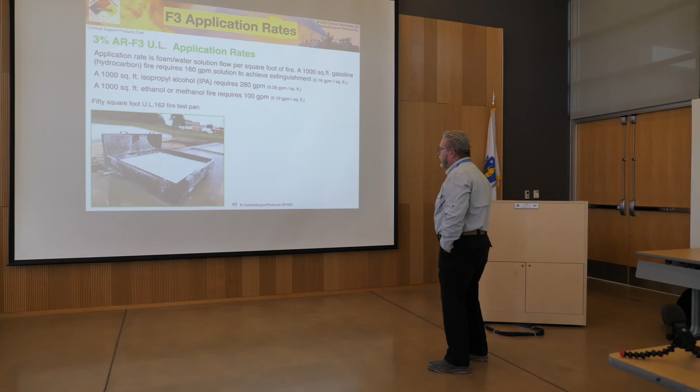Well, I'm going to blow through this one because I've already burned them out with this application rate stuff. This is what a UL test pan looks like. This is what I did in Jersey Wednesday, Thursday and Friday. We had people from all over the East come to this, and what we had to do is put the fires out in accordance with its UL listing.

So I did the wetting agents. Couldn't put any of the fires out with the wetting agents because I didn't have a water bottom in them. I put gasoline in the pan with no water in the bottom - that was the end of that. It was Katie bar the door, couldn't put the fire out. Some of the other foams worked fine, some didn't. But that would be what that looks like.

It's 50 square feet, so if you apply the 1/10 of a gallon per minute per square foot rate, that would be 5 gallons a minute. You've got to put the fire out in less than 3 minutes with 5 gallons a minute and hold for 15 minutes after, which makes it kind of difficult. So I'm not going to bug you with that - this is on the handout. If you want to read it and do your own research, that's fine. I'm not going to spend a lot of time on that now since I'm getting close to the 12.

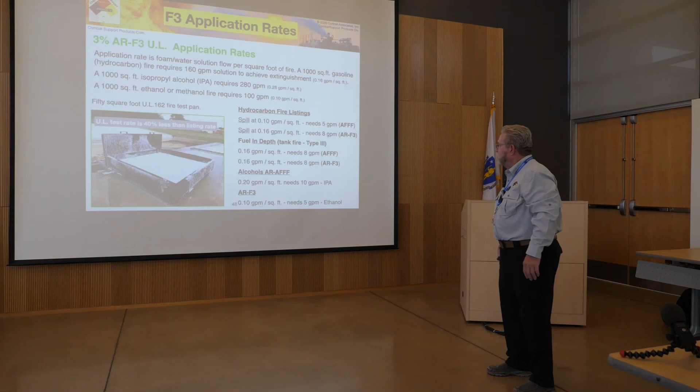Marine - this is one of my specialties. So the marine stuff is going to be tough, making the calls for marine. Massport has a really nice boat, Boston's got a nice boat. There's a couple of others along the waterways that have foam systems on board.

Now we're going to have to aerate. The good old aqueous film forming foam is gone. So we've pulled a lot of the fangs out of the snake now by eliminating aqueous film. And this guy's got - the guy in the middle there, actually the other day I had to deal with it.

So anyway, the systems have to be accurately proportioning now, no question about it. You've got to be - I'm fine if it's 1 full percent rich. In fact, UL says you can be 1% rich, but you can be no lean. That's my rule of thumb when I go out and do these tests. Somebody says it seems to be a little rich - well, if it's 1% rich, I'm good. Can't be more than 1%, then it gets to be stupid. But no lean.

Here's my F3 discussion. I got a fire on the water here in Virginia. Come on, you damn fool. And this fire self-extinguished, believe it or not. This was Bakken crude that came off the rails along the James River, which was pretty cold. And as the Bakken crude spread across the cold river, thank God for the fire department there, it struggled and went out. If it didn't, well, wouldn't have made much difference because it was in the river heading downstream.

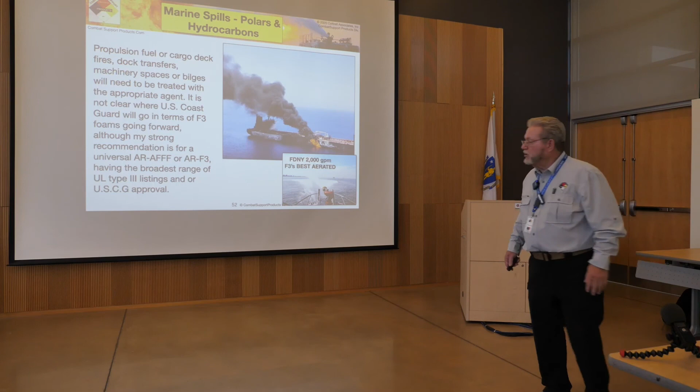Propulsion fuel or cargo deck fires, dock transfers, machinery spaces, or bilges will need to be treated with the appropriate agent. It's not clear where the U.S. Coast Guard will go in terms of F3 foams going forward, although my strong recommendation is for a universal ARF3, having the broadest range of UL Type 3 listings or U.S. Coast Guard approval. Coast Guard's a difficult approval to get for polar solvents. For the hydrocarbons, it's not that bad, but they're worse than the Navy.

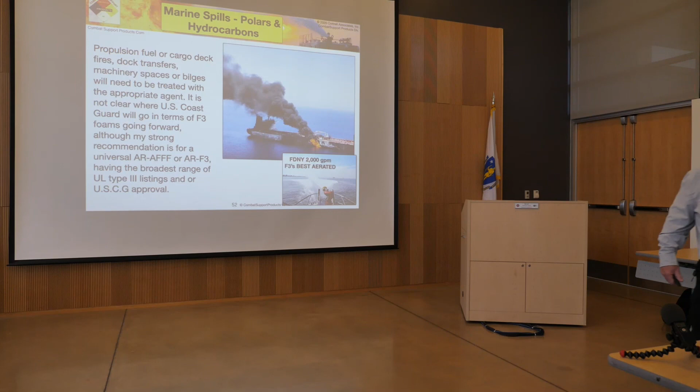So this is a fairly good - this is about a 5 to 1 expansion from the Bravest. This is at 2,000 gallons a minute, and he's got a pretty good froth going there. So if I had a gasoline spill, I feel pretty good that it'd probably knock it down. The trouble is holding it from another ignition is the problem - there is a big problem. So we're going to have to figure out how to put an aerator on that nozzle, and right now, that's something that I'm working on.

If I'm using brackish water, in some of your waterways in these parts, brackish for quite a ways up from the ocean, that will affect your quarter life or residence time by as much as 50%. So foam quality is really affected by the salinity of the water.

So what we have to do is jump through the UL hoops with seawater, and that was one of those scope document things, because most of the people I deal with are on the coast, no matter where I go in the country. Out in Oklahoma, they could care less, but here in New England, it's a big deal.

It says break. I'm going to blow through the break because it's 11:30 and we'll get you out of here at lunchtime, is that all right? What's that mean, 2-minute break? No, two? We're supposed to go 2 hours. Well, I start... oh, I am late. Way late.

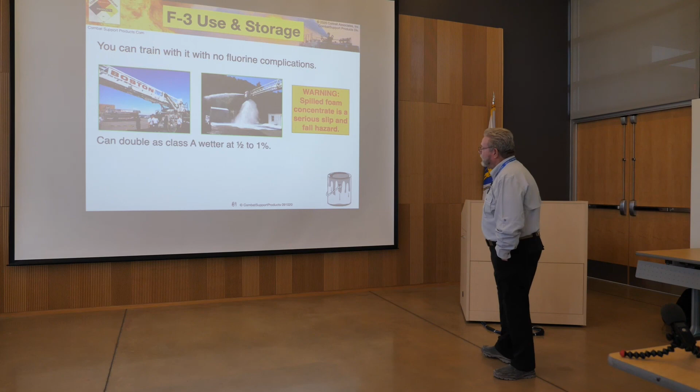This would be the economics, which is definitely an issue for a lot of folks sitting in the room. Use and storage: you can train with it with no fluorine complications. Warning, spilled foam concentrate is a serious slip and fall hazard. Can double as a Class A wetter at 0.5 to 1%. So yes, you can use it for Class A. Will you get a lot of bubbles? Not at 1%, not at 0.5%, but it'll soak like the dickens.

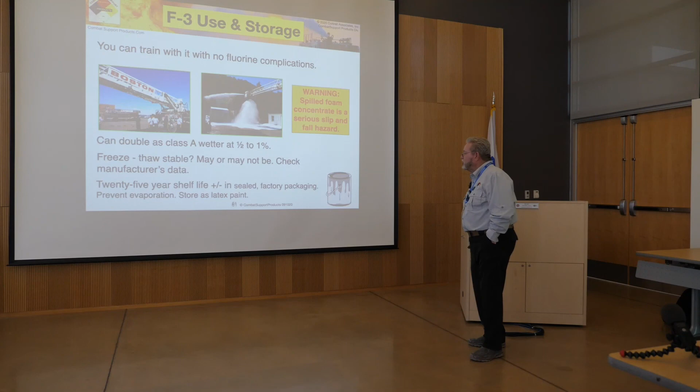Freeze thaw stable, may or may not be—check the manufacturer's data sheet. That's a serious issue in these latitudes. 25-year shelf life in sealed factory packaging can be expected of all manufacturers, it's not a brand thing. Prevent evaporation, stored as if it were latex paint.

If you want to do the UL stuff, we can do it here. Yes sir—as far as the F3, still the same things with the inductors, 200 PSI, 200 feet? Nothing has changed mechanically. What my view is, most, all but the ones I kind of invented for TFT, which are a new design, probably don't do alcohol-resistant foams very accurately. They were never engineered—they were engineered long before there was such a thing as alcohol-resistant foams. So my life's experience is that they tend to proportion lean, which was okay, I didn't really worry about it while it was fluorine. Now that the fluorine is gone, now I've got to be a little more circumspect about giving people a pass on proportioning accuracy. So FDNY has just jumped all over me about checking all the proportioning accuracy on some of theirs, and we're going to do it. They're not in a crapshoot anymore, as you can imagine.